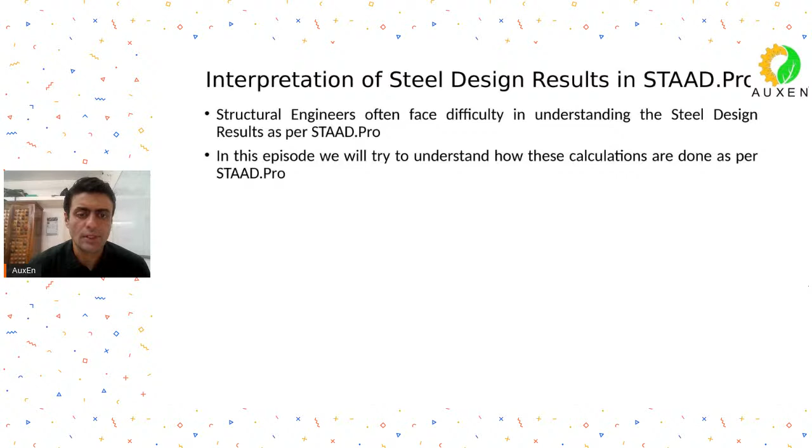I have actually prepared some handwritten notes to avoid any copyright issues, so we have not taken any internet images. We have just made a few notes on the screenshots from STAAD.Pro. Here you can see a typical steel design output screenshot, isn't it? You can see the code that is being used. We are using IS 800 2007.

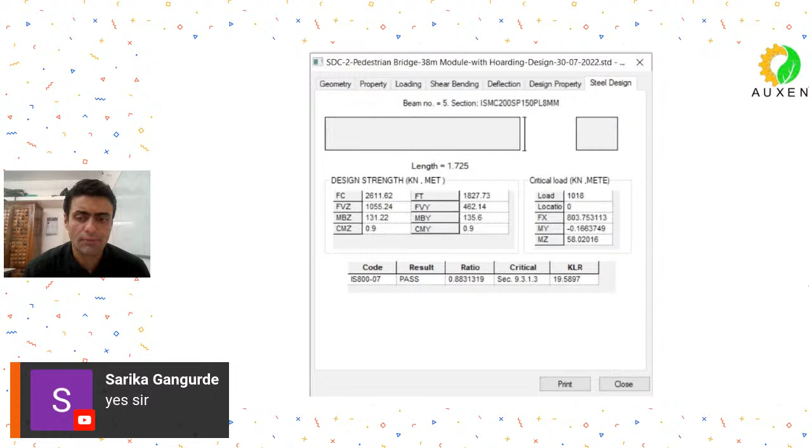Then it is showing me some critical, and then it is giving me a section or clause number, whatever. And I don't know what is this design strength. So many times you do not understand what all these figures are about. Okay, so therefore we will try to declutter it today. What you see over here, I've just tried to scribble some data on this itself.

On your right side, you see the critical loads and the critical load combination. For example, here you are seeing load combination number 1018 on the top right corner. Then you see at which location you are getting that criticality. Then written in red are the actual loads for which the most critical design is being performed. You will find the axial load and the moments about the two axes.

Fx is your axial load, Mz is your moment about the major axis, My is the moment about the minor axis. Z usually is the major axis when you take standard sections from STAAD.Pro. So on your right, you get the critical loads for which the design is being performed. On your left, you get all sorts of design strengths. You will see FC being written. FC is the design strength in compression.

You will see FT being written. FT will be the design strength in tension. Then you will see FVZ and FVY. These are the shear; when I say strength, I basically mean the capacities. So FVZ and FVY will be the shear capacities. MBZ and MBY will be the bending moment capacities. And CMZ, CMY is actually a factor which is used in the combined interaction check. This way you get a summary of all these values over here.

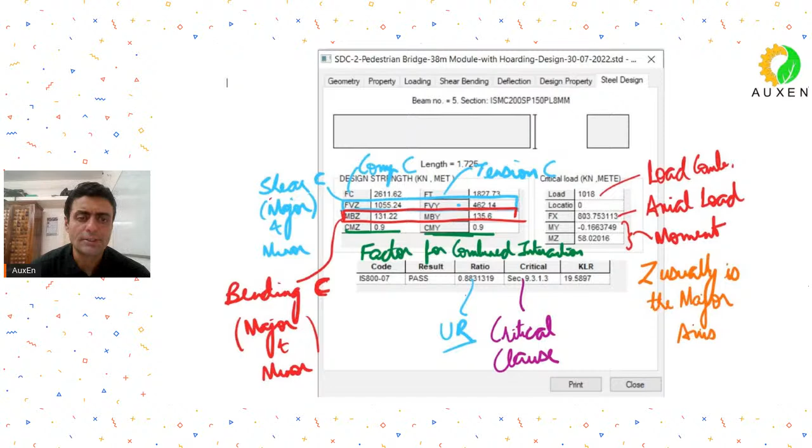So when you press TRACK 2 and you run your analysis and design, then you get a summary of the results and some detailed values. When you go to the output file, you see this type of output, isn't it? It's actually a one page output that you get for each member, and I have tried to paste some screenshots over here, and we will quickly see what all these values are about.

So you see data like this in the output. In the end, you get a table where you have a lot of utilization ratios being written, isn't it? Now we will try to understand how all these values are being given by STAAD and what is their meaning. Over here, you can see the ratio that STAAD is showing you, 0.883. Then it is showing me the critical load combination. Right now the critical load combination is 1018. It is being checked at this location 00, and these are the critical design forces.

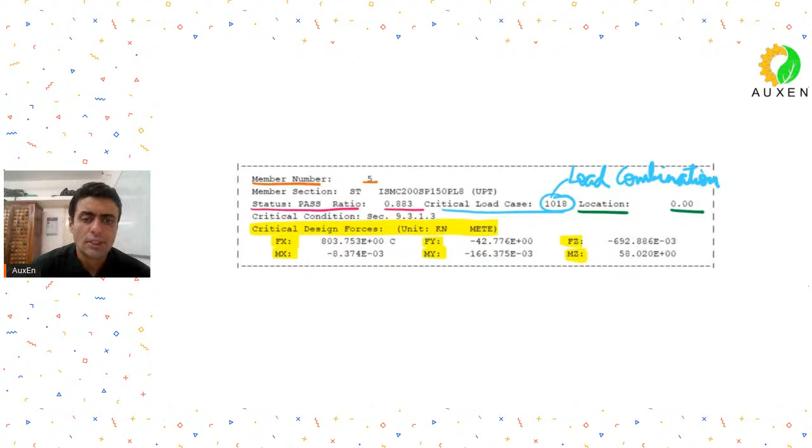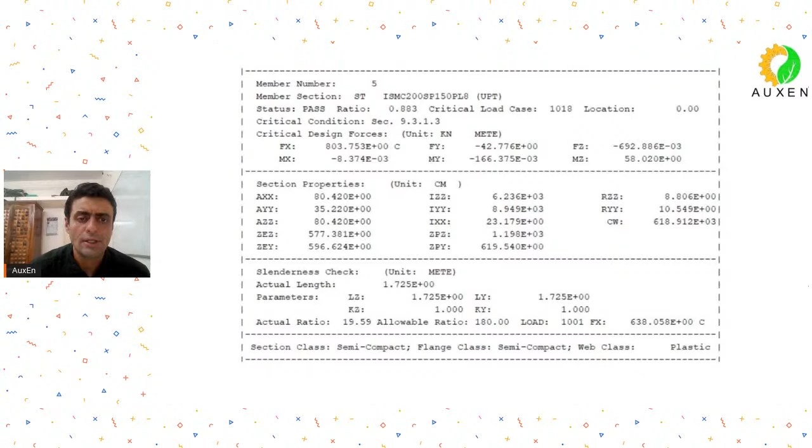Okay. So the summary of forces, for which load combination, and for what critical clause number the design is being done, all these things you get in the first couple of rows. So this was our total output report that we get. Now we are understanding it. Each box I am trying to decode over here.

Then in the next box you get the cross sectional properties, your section properties. You will see area of cross section AXX; AYY and AZZ are your shear areas. Then you get the section modulus. ZEZ is the elastic section modulus. About both axes you are getting the results. Then ZPZ and ZPY are your plastic section modulus.

Where do we use plastic section modulus in steel design? If you have experience of doing steel design as per IS 800, where do we use it? Plastic section modulus is used in finding out the bending moment capacity of your section, isn't it? If your section is plastic or compact, then you use the plastic section modulus value for calculating the moment capacity of your section.

Then you will see RZZ, RYY. These are of course the radius of gyration. IZZ, IYY are the moment of inertia values. Then you see an IXX value being written. IXX is actually IT, the torsional constant, as per Annexure E of IS 800 2007. Again, this value is used for calculating the bending moment capacity of laterally unsupported beams, isn't it?

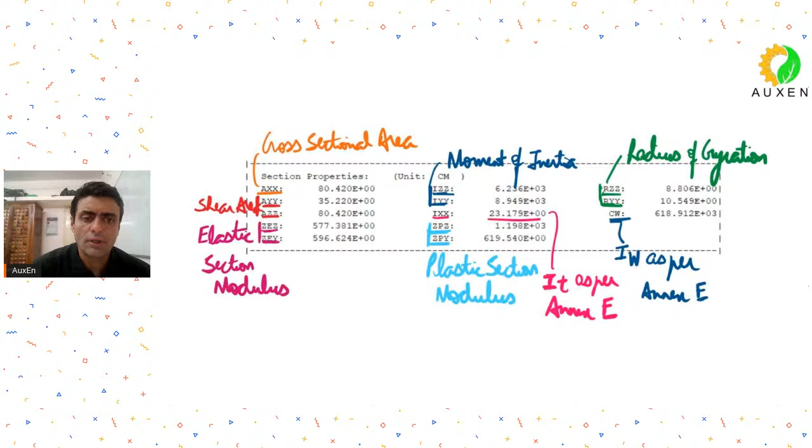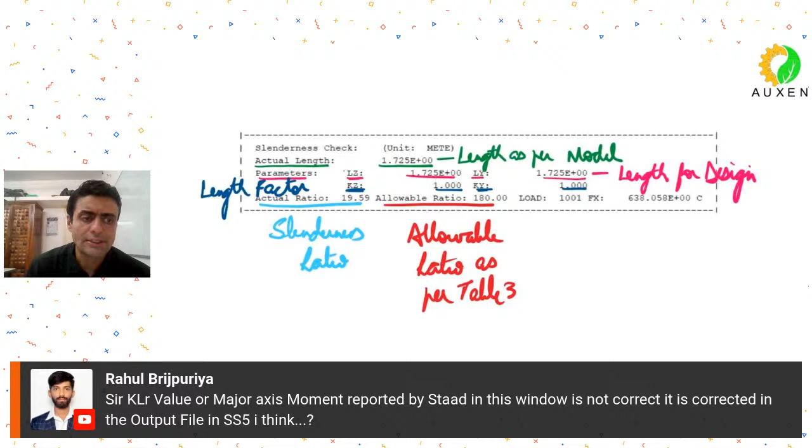Then if you go to the next box, here you will see the first check being performed, that is the slenderness check. STAAD calculates the slenderness ratio, K into effective length divided by radius of gyration, and that ratio should be less than the allowable value. From where do you get this allowable value? You get it from Table 3, and as a default 180 is the slenderness ratio set in STAAD. So this is what you get in the third box.

Then STAAD starts checking the utilization ratio, but before that it will give you a section classification. When steel design is performed using IS 800 2007, a very important step is to first find out the section classification, because all your formulae, especially for moment capacity, depend on the section type. So how many section classes are given in IS 800 2007?

So there are four section classes given to you, isn't it? Plastic section, compact section, semi-compact section, and slender section. All these classifications are given to you in Table 2. STAAD Pro is able to do this classification on its own. It will do a classification for flange, it will do a classification for web, and then whichever is the worst, it will give that as the section classification. All right. So in this fourth box, the section classification is done.

Then one by one, it starts calculating the various capacities. The first capacity being calculated is that for tension. That is done as per Section 6 of IS 800:2007. Again, you see the checks being performed. Basically, STAAD is able to do two calculations. It calculates the capacity in rupture, and it will calculate the capacity in yield. For block shear, it does not do it on its own. If you give the areas, then it will perform the block shear check, not otherwise.

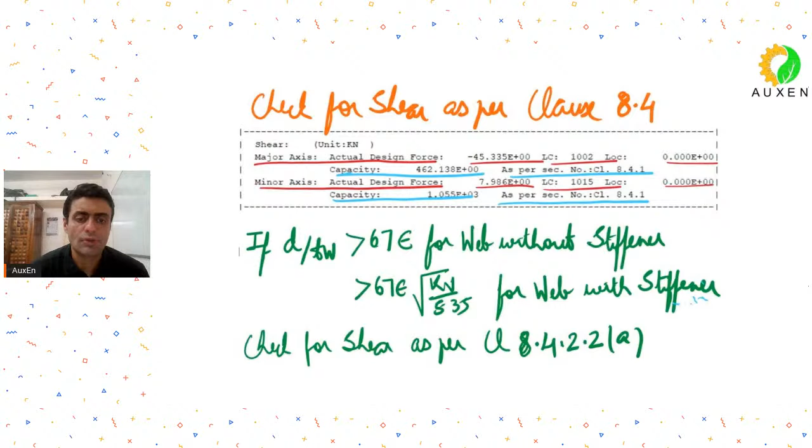Then it will do a check for combined interaction, meaning compression plus bending, or tension plus bending. STAAD is able to do those checks quite well, but it does not display the detailed calculations, just some ratios. One more important point: in the combined interaction calculations, it calculates what are called CMX, CMY, and CMZ. CMX is actually known as CmLT in your code. Conservatively, STAAD takes all these values as 0.9.

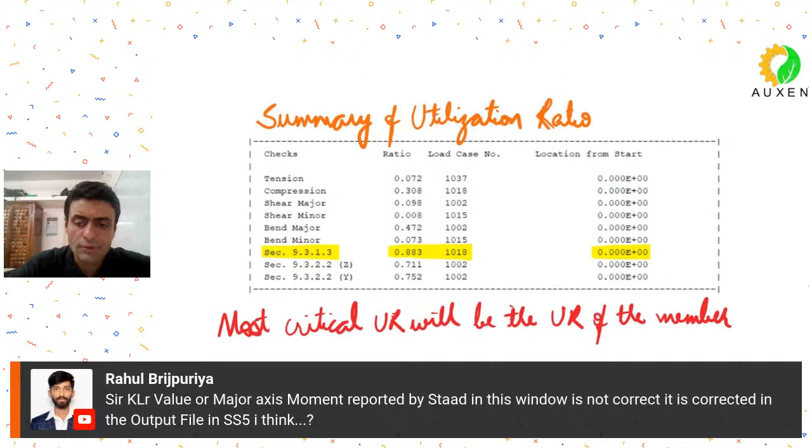So Rahul is asking, KLR value or major axis moment reported by STAAD in this window is not correct. It is corrected in the output file. No, no, it is correct. I have checked it and it is correct. There is no problem. We have made some Excel sheets, and we get quite good results with that. So it has been checked.

Yes. So this was about our first segment, where I thought we will take up this issue, because understanding of steel design results is often a problem faced by practicing engineers. Now we quickly go to our second segment, and that is where we take a query from a project that a practicing engineer is doing, and they have doubt regarding it. So we are going to take up that project. All right. So let us see what our project related query is this time.

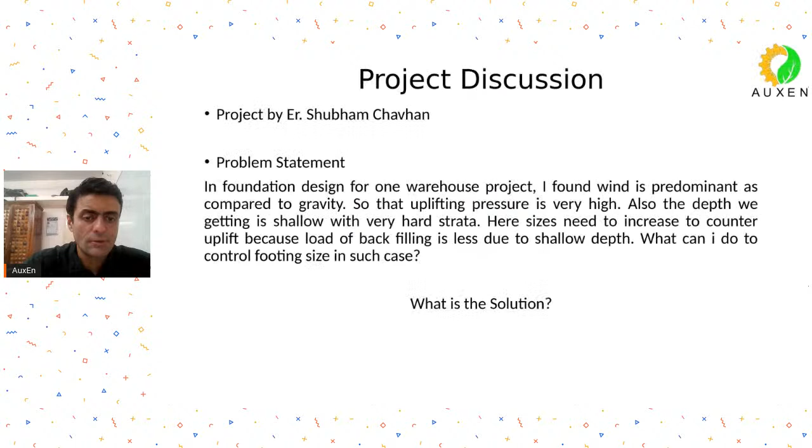So we have this query from engineer Shubham Chavhan. He is from Indore, and he is practicing as a structural engineer, and he does a lot of PEB projects, warehouse shed projects. So I don't know if someone of you has experience in doing these types of warehouse projects.

There is often a problem that in these types of projects, the axial load on the column is quite low, and the bending moment that you get on the column is quite high, isn't it? Have you faced, or have you ever experienced such type of a thing before? So most of the practicing engineers come up with this issue, that in their PEB project, their bending moment is quite high in the column, and the axial load is very low. And now they have to do a footing, let's say.

So his question is that in foundation design for one of his projects, he found that wind is predominant. Of course, in most of the PEB projects, you will find that the wind is predominant as compared to gravity. So what happens if you have low P and high moment? What will happen if you go for footing design? Yes. So I think most of you will appreciate that you will get high values of uplift, isn't it?

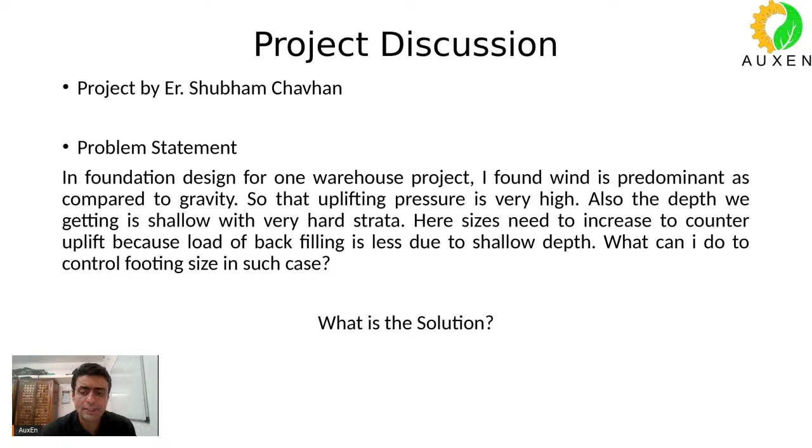So providing a fixed eccentricity to counter the moment is good when you have a fixed direction of moment. If your moment direction is reversing, then providing fixed eccentricity is not a good solution. Do you get it? So what is the solution then in hard strata? If it was a soft strata, and if piling was possible, I would have told you to go ahead with piling in soft strata.

In a strata where you have a clay or a sandy type of underlying strata, piling is a good option. But then what do we do in hard strata? Because piling cannot be done. So in such cases, rock anchoring is a good solution. What is the meaning of rock anchoring? You drill holes, vertical holes in your rock.

So what I have done is I have taken a quick numerical just to understand how you can do some quick back of the envelope calculations. Proper calculations you may have to do on some 3D finite element software like SAFE, or maybe ETABS, where you can model these rock anchors as springs and all those things. But here we are just trying to do some quick back of the envelope calculations, easily understandable by general people, isn't it? So let us try to see what we can possibly do.

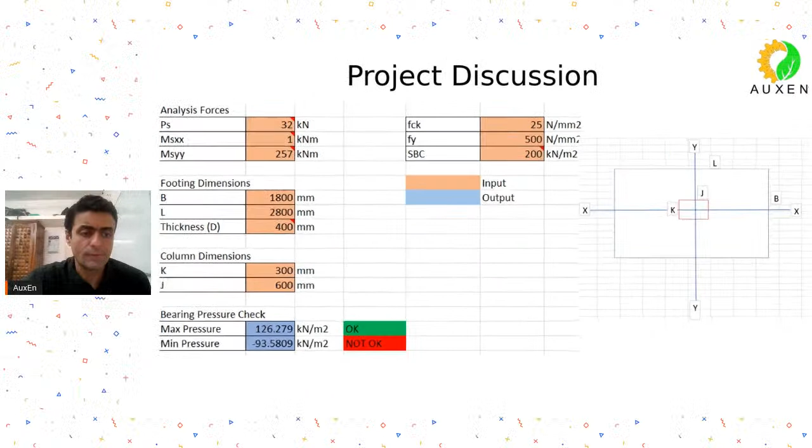So in such a case, I have taken a sample analysis force. So if you see, this P is 32 kilonewton. This is after taking all the self weight, everything has been considered in this. So the service P is only 32 kilonewtons. On your right side you can see a footing sketch. So the moment about y axis is quite large, 257 kilonewton meter, and I have got a footing size of 1800 by 2800.

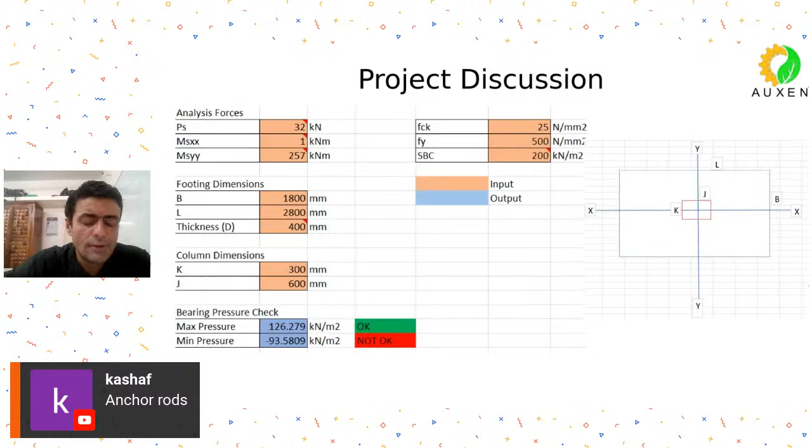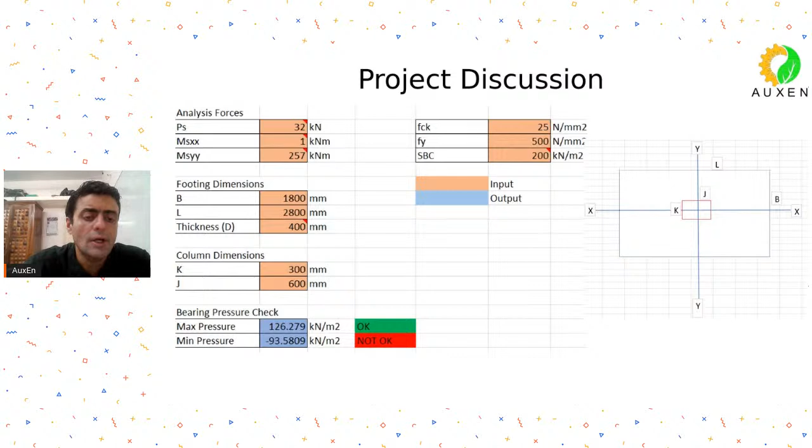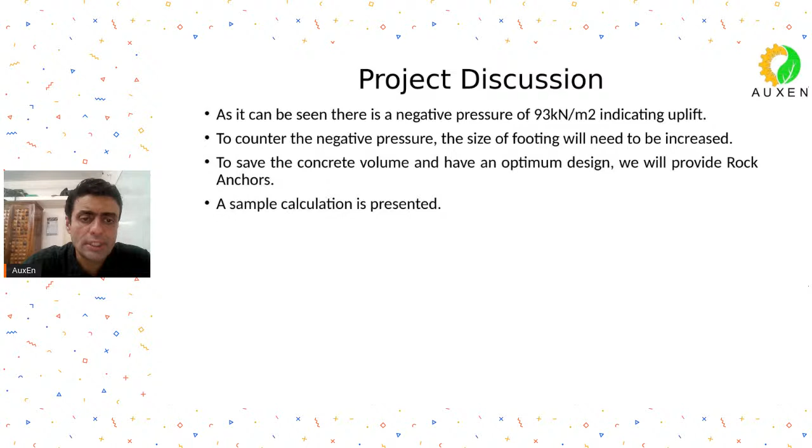Okay. So if you see the maximum bearing pressure, we are getting 126 kilonewton per meter square, and minimum pressure we are getting minus 93. That is large. 10 tons of uplift is a pretty huge value to have, isn't it? Now let us see how we can work out some anchor calculations. To counter the negative pressure, you may have to increase the size, but in order to save the concrete volume, we are now going to provide some rock anchors.

So that comes out to be 100.48 kilonewtons. Okay. Then, load per anchor we have calculated as 33.49, and now we are choosing a 16 dia Fe500 reinforcement as our anchor. Permissible stress in tension, I am writing 0.6 Fy. Why am I writing 0.6 Fy? Why not 0.87 Fy? Why 0.6 Fy?

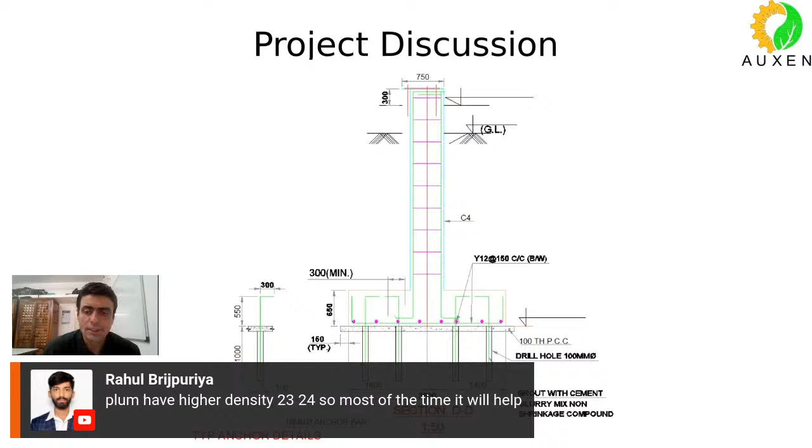So if you have any questions related to this, you can quickly ask. Rahul is saying plum will have higher density. No, but plum was not applicable. Yes, any question related to this? No.

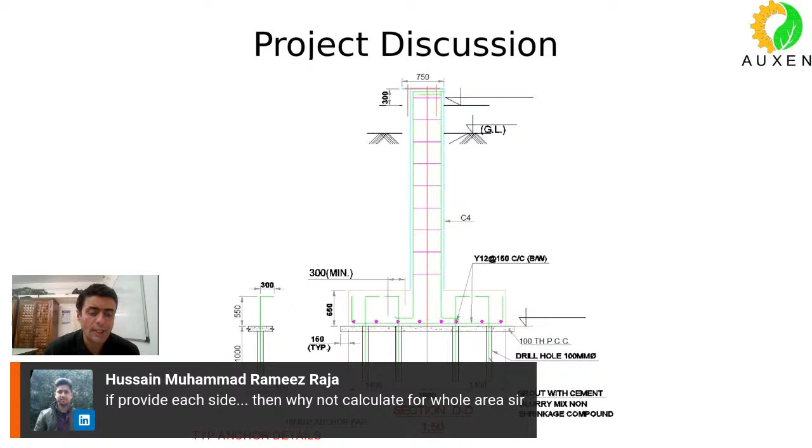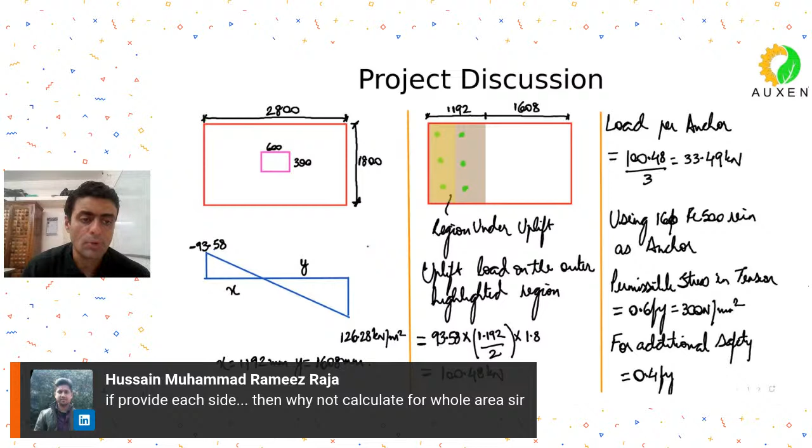Mr. Hussain is asking, if we provide each side, then why not calculate for whole area? Because if you see, the uplift is only on one portion of the footing at a time, isn't it? If you see this image on the left, you will see that the uplift is only on one portion of the footing. So uplift can be either on one side or it can be on the other side. You are not getting uplift in the entire footing. A portion of your footing is undergoing uplift.

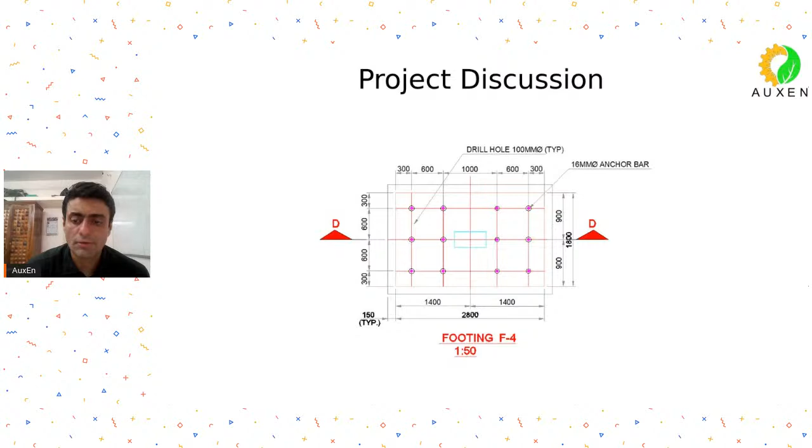Okay, but then why am I providing it on both sides? Because of possible reversal, load reversal. Good. So this was an interesting question that we had received, and therefore we thought that we should take this issue up, because it is a problem quite often faced. So we also face this problem, and many practicing engineers also face this problem.

I will again repeat that if a similar issue is encountered in a clayey or a sandy strata, then the best scenario would be to go for piling. All right, that will be the most efficient option. So actually, this anchor rod is also behaving similar to a pile. It is taking the tension. Your pile also takes tension. Anchor rods will also take tension. So this is all about this project query that we had.

Now we will move on to our third segment. And as you know, this is a segment where we learn from others' experiences, because peer to peer learning is always the best way to learn. So this time we have a very special guest. He is engineer Muhammad Atif Nawaz. He is a manager in RV Consultants Hyderabad, and he is working on the Chennai Metro rail project as of now. He was associated with the Bangalore Metro project also.

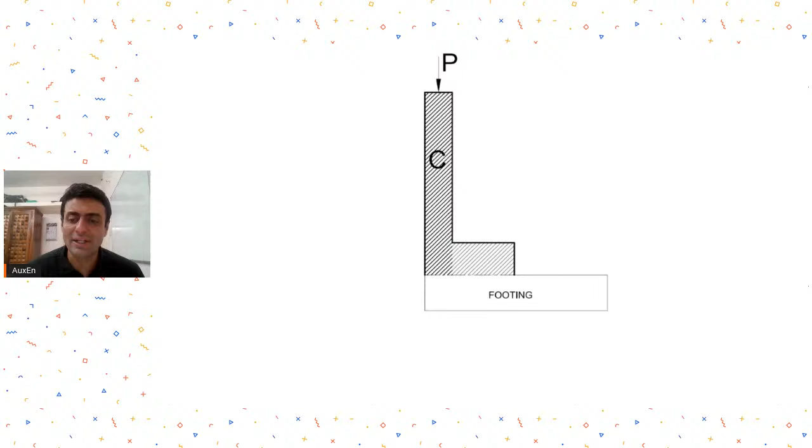Good. So we'll just take up some questions for open discussion. Typically we ask you people to give in your questions, and many of you write your queries, questions, doubts, etc. So let me take some questions that we had curated for this episode. Mr. Rahul had sent us, actually he had done a lot of work. He had prepared some images and sent those images on the mail. And it's actually an interesting question, and I would like to have the view of the audience on this.

So he's saying that by providing this type of a step column, if you see what he has done, he has an eccentric column and footing, and then he has extended the column at the base, in the light hatch. So he has extended that column on the footing, just near the top of the footing, and he's asking if by doing this, can we reduce the eccentricity of column load? So anyone would like to answer this? I hope you got his question.

He's saying that he has extended the column near the top of footing in this way, what you see as a light hatch. The dark hatch vertical is the column. The column is eccentric. So the axial load P will create an eccentric moment. That will be a pain for the design of footing. So can such an extension of column help?

So according to me, if this has some axial load, and of course its center is on the other side of the footing center, then it will help you to counterbalance the eccentricity. Otherwise I don't see this extension helping in any way. This is my opinion. In fact, it will add to the eccentric moment if the center of this small extension is on the same side as the column center, isn't it? It will actually be counterproductive. So I don't quite see this helping you.

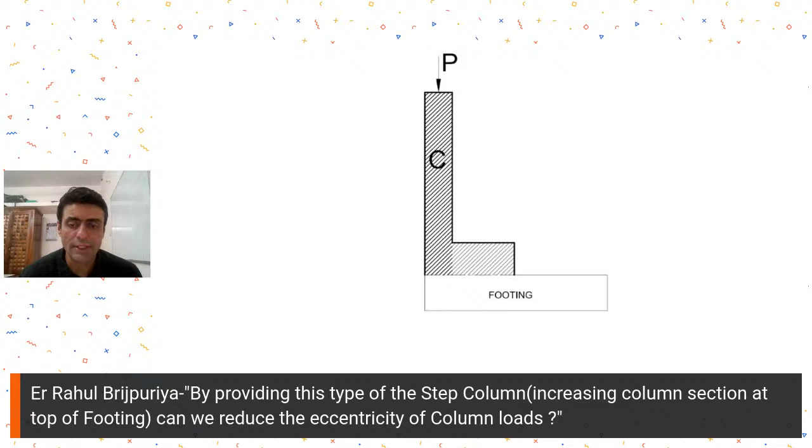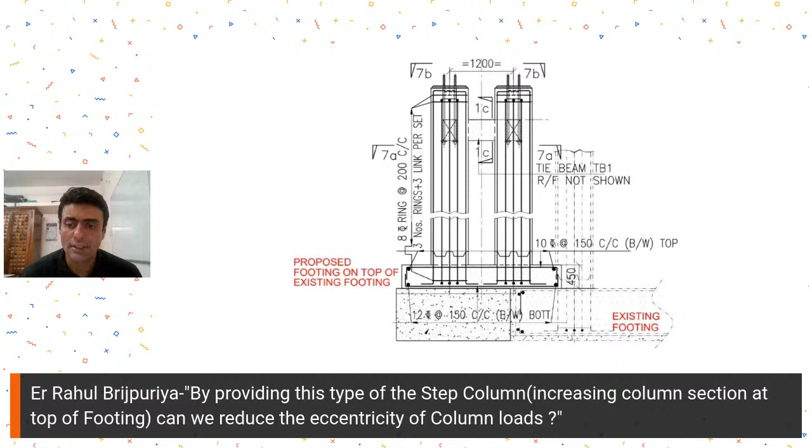Then his next question was, he has this type of an arrangement, and I'll just put his question. Yeah. So he has an existing footing that you can see on the bottom right side, and then he wants to add another footing above it. So these types of situations are quite common when it comes to industrial structures.

So these problems are quite often faced by engineers, that you already have an existing footing, and now over that existing footing you have to add another footing, or you have to put another footing. So he's asking, can we build one footing on the top of another footing? And the criteria condition is that the SBC is quite high. So according to me, this can be done.

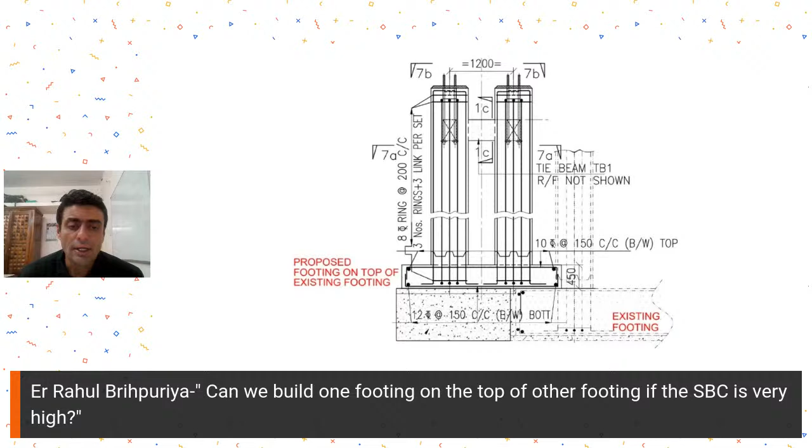What you should do is add up all the loads, see what the size of the existing footing was, whether it needs any size extension, and then you will have to provide some plum concrete below it, as you have done. Now, if there is some additional axial load that is getting transferred to that existing footing, then you have to increase the area. So after doing all those things, this proposed footing can work. I don't see any problem with it.

And Mr. Hussein also agrees. He is also saying extension will act as, yeah. This extension, what you are seeing right now, is plum concrete that they have provided. So from what I can see in this figure, it is not getting integrally connected with the existing footing. So it is acting only as a base for the proposed footing on the top of the existing footing.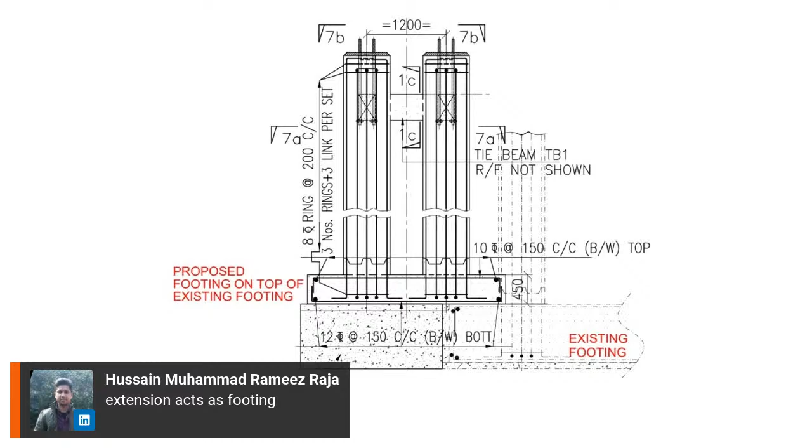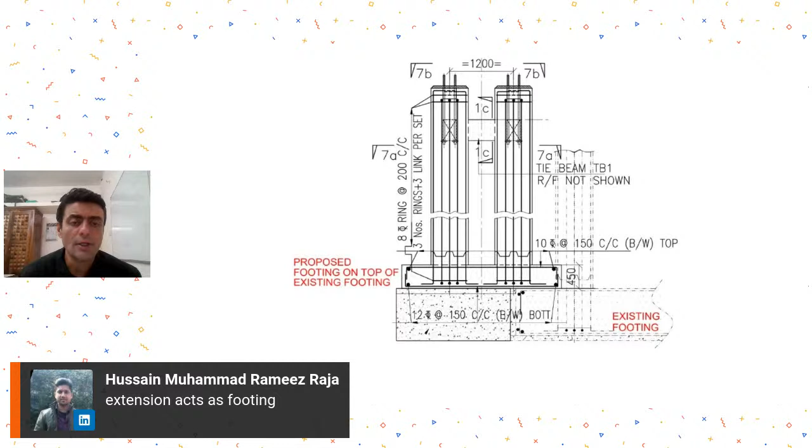I personally don't have much problem with this. We also have provided such kinds of arrangements. So this can be done. Yes, so this was what Mr. Rahul had to ask.

Hussain continues, what software to learn and how to correlate with books and code. So software, I think if you are in the building line, ETABS, STAAD, SAFE, this is quite helpful. More than software, you should understand the process of design that needs to be performed as a structural engineer. So right now at the master's level, learning software is good.

See, when we were in our masters, actually we didn't even know how to run software. To be very honest, I did not know how to use ETABS or SAFE, I only had some basic knowledge of STAAD Pro. So when we did a job, that is the time when we learned everything. But we always had some sound knowledge of design. That is one thing that we had during our masters. So software you can learn quite quickly and easily. Try to focus more on the design part, how the design is to be done. That is quite important.

Which books? So as Mr. Atif also said, Pillai Menon is a really good book for RCC design. And start with the basics. There is a problem that when we are in masters, we think that now we have become quite hi-fi, or we are now technically very advanced. So we tend to forget the basics. So stick to the basics.